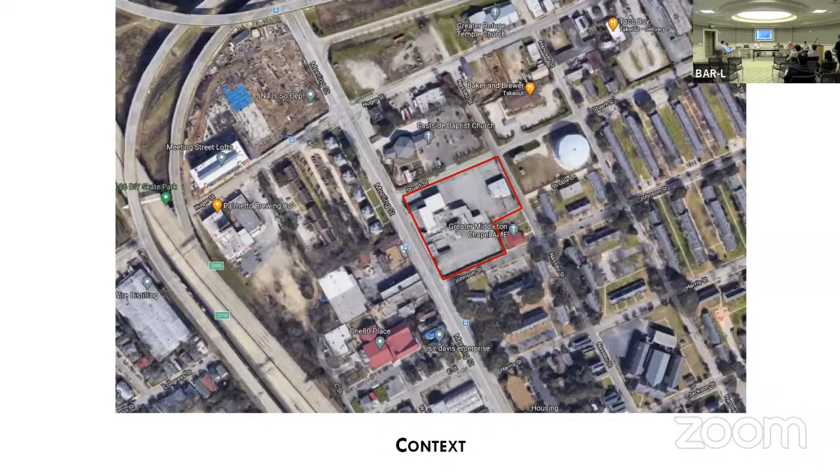And with that, we have some context slides. First one there, if you'll back up one please, Mr. Golly. That shows Meeting Street on the west, Johnson Street on the south, Stuart on the north, and Nassau on the east. That central section there is the portion of the building that will remain as what is being termed the remnant building. That is a portion that has been approved for demolition. This is looking from the rear; most of that, in fact all of that you can see, will be removed. Across the way there are these historic structures, and the first on the side is the Greater Middleton AME Church at the corner of Nassau and Stuart.

Okay, now a quick presentation, thank you very much.

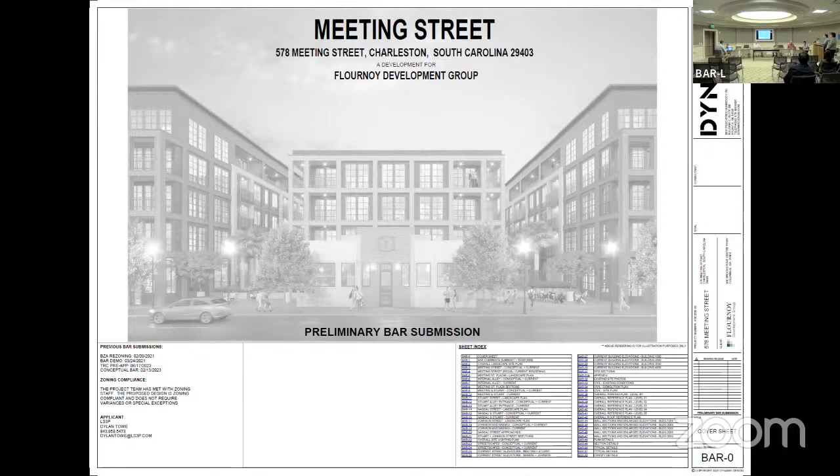What we're going to talk about first is the actual comments themselves. It's a little hard to read up here, but there's a handful of staff comments and a few board comments we want to go through. I'll read the comments and touch on our approach, and later in the presentation you'll see visual representation of how we addressed them.

We took the same thought and care with these comments that we did in the initial round during the previous reviews of the multiple design iterations for this project. I think it'll show that we've taken the success of the original conceptual design, built upon it with the feedback from conceptual review, and enhanced and furthered the detailing so the project remains as high quality as before, building on the success we had established.

The first comment was asking us to restudy the fifth floor, and you can see in some of the images on the bottom middle of the page. There were comments about the darkness of the fifth floor that fronts and wraps around the two corners. So we'll talk about how we addressed that from a detailing and color perspective.

The second comment was that at the fifth floor elevation, the brick wasn't wrapping around one of the elevations—it was just a flat facade, with fiber cement wrapping around the corner. So the request was that we continue the brick around that corner, which we've done.

The third comment was asking us for the fourth and fifth floors to be more consistent. That's in regard to some windows shown that are of a horizontal orientation. So we've removed those from the project so that the windows that remain are vertically oriented, to be consistent across the entire project.

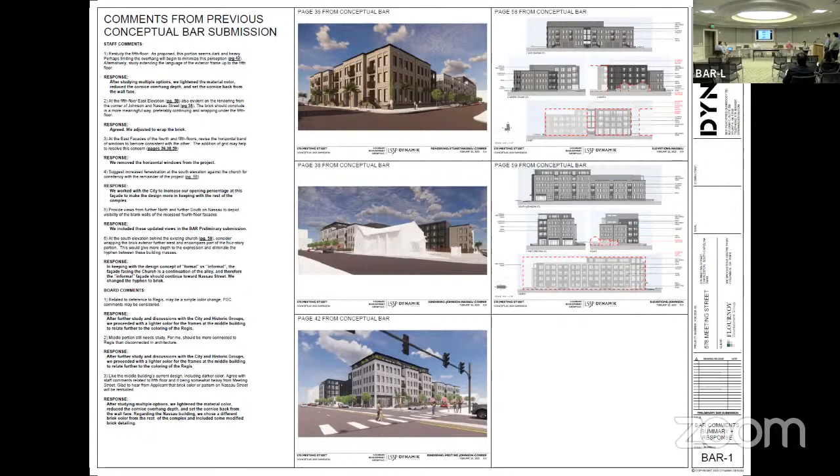This is Christoph Drumming from DesignWorks. In terms of site plan, it hasn't really changed. For those who were at the meeting before, the whole concept was to break the building into four buildings with alleyways throughout, pedestrian access on four sides, two plazas on Meeting Street to welcome the public into the site, with the historic building in the middle.

We kept pretty much the design from the conceptual level, just fleshed out further in terms of materials, detail of the planters, height of the planters, and other items.

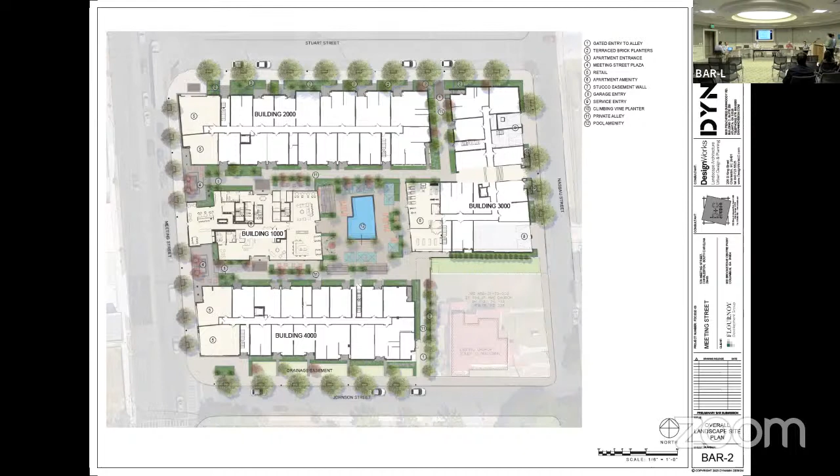We made some adjustments to the colors being painted onto the existing Regis building to give a little more character and delineation between the various facades to accentuate the design. Currently it's all painted white brick, so we have three separate colors for each tier of that facade. The request we thought was most appropriate was to lighten it up, so you can see the colors a little lighter in the new rendering on the bottom.

One thing that came out of that was some general concern about the amount of fiber cement being shown, which is what those outboard frames were originally proposed as. So we went back and thought through the detailing of that and what the best material was to create the look we were trying to achieve.

What we settled on, reflected in this model, is a prefabricated profiled FRP panel that creates the outboard element, reducing the fiber cement on the project by a little more than half. One of the main reasons we wanted to go with FRP is because it gives consistency in the detailing and in the look of the building, and it reduces the number of seams. In the previous detailing, built up with fiber cement profiles, maintaining the level of craftsmanship we want would be difficult.

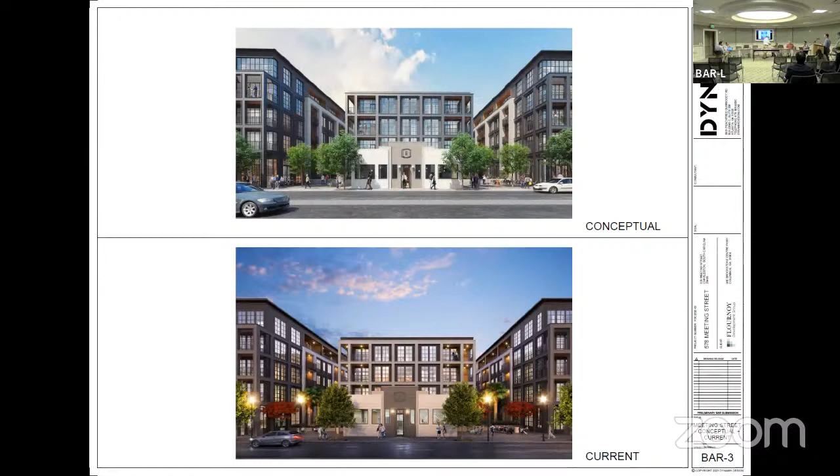In the enlargement you can see a little better how we incorporated that. Before the conceptual review we did try a more traditional design for this building to make it look more like the Regis, but all the iterations we did felt were not in keeping with the design of the Regis. It served to make the Regis feel like it disappeared into that building, whereas keeping the contemporary design lets the Regis have its own presence on the street.

Going down to the street level, the project has really not changed from where we left the scheme. What you're seeing is basically the use of pavers and bricks. You have a small sample on the top right and a physical sample here, but it's basically keeping the tone on light gray, darker grays, with mixed texture. It's not really brown brick, it's more of a lighter color.

That will also carry into the alleys in a much more simple color palette. We're using those three colors to create a kind of classic pattern on the ground, and then you have a few steps up to the alleyways.

The detail you see in the gates, which you don't see in the 3D color, uses the same dark, kind of brownish color. We're using that same color for the gates, the arches, and the lanterns. The ground is basically sealed block stucco with a cap of precast, using the same palette as the rest of the buildings.

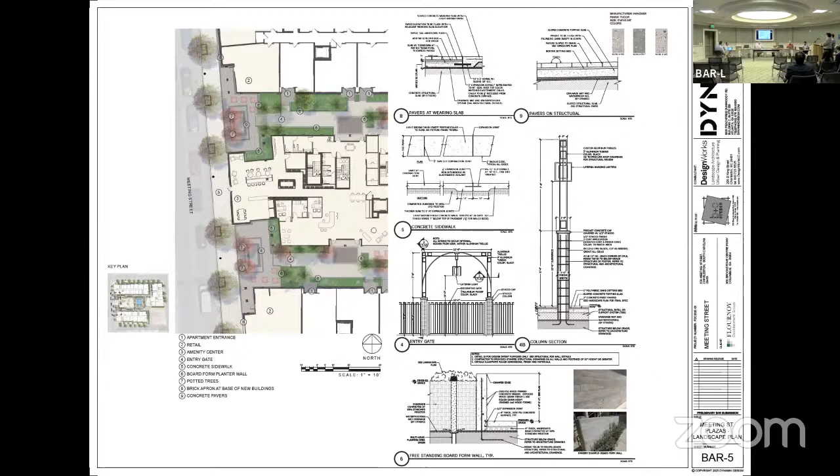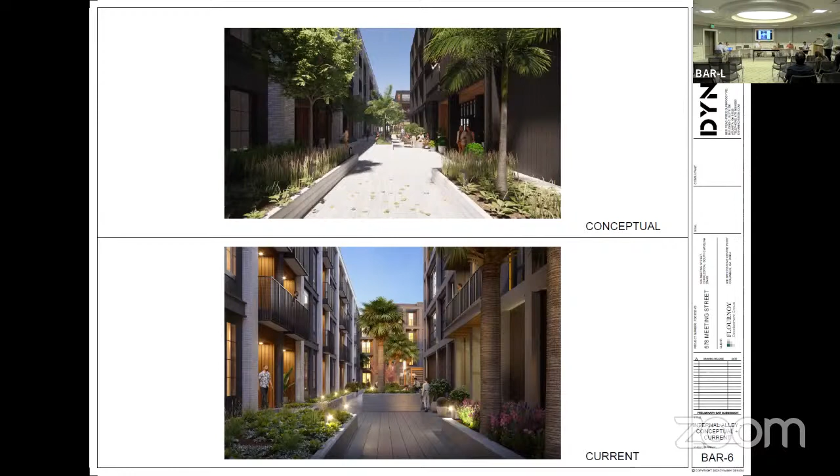The only thing we want to talk about here by including these sections is that part of the challenge with this project is that it's in the floodplain. We have to have the residential flooring at a certain level above that, and we've buried all our parking. So one thing we've done to make the project better as a result of working through those things is to let the difference in elevation help delineate public versus private, and the transition from the public street area—where there's a lot of planters and knee wall seating—to the more private alleys that are just for residents. This is still the case here from what we presented originally.

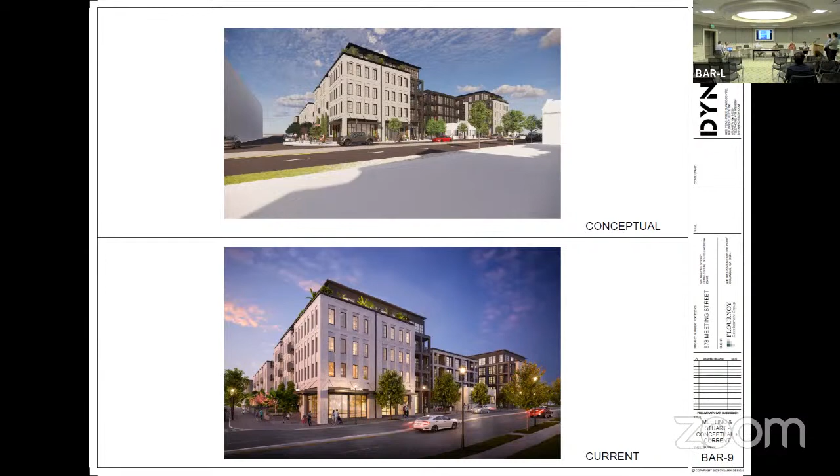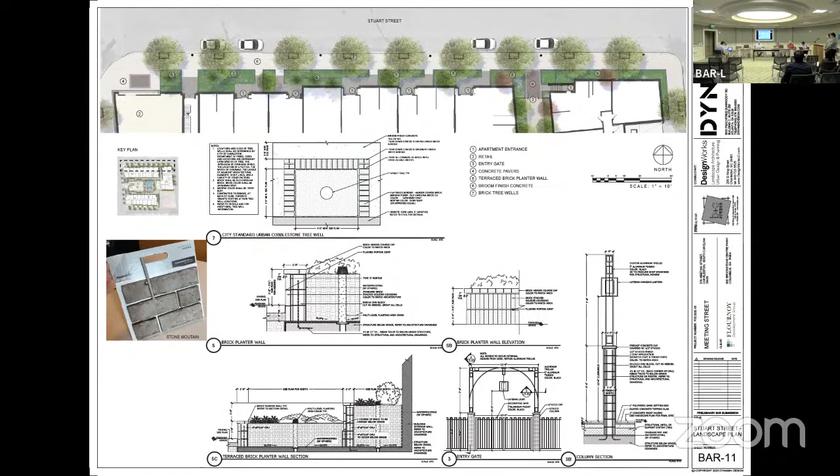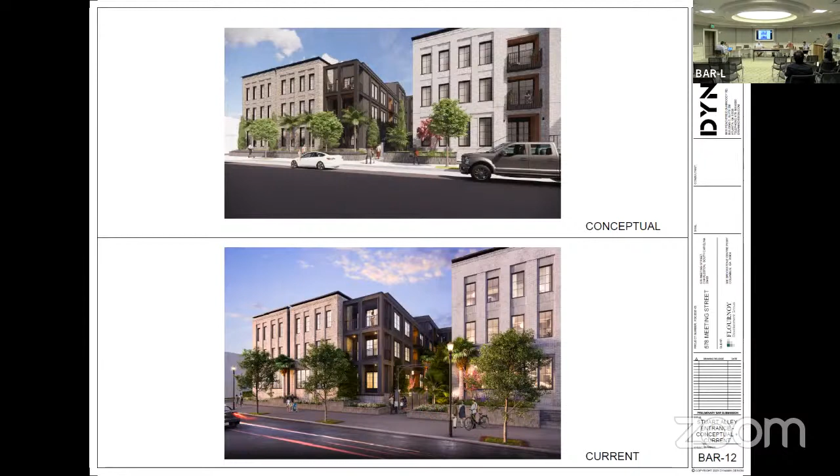Another thing you can see from the evolution from the conceptual design, as we worked in more detail about the trees with those palms and everything else, is that we tried to keep those planters as low as possible—like a big wall in front of the building. So when we don't need the trees, we keep them at 19 inches, 20 inches, then 25 inches, and go up to 26 inches when a tree is needed. This helps in this scenario to show the gate better—if you get it really high, you can see the iron gate in the middle, with the lantern.

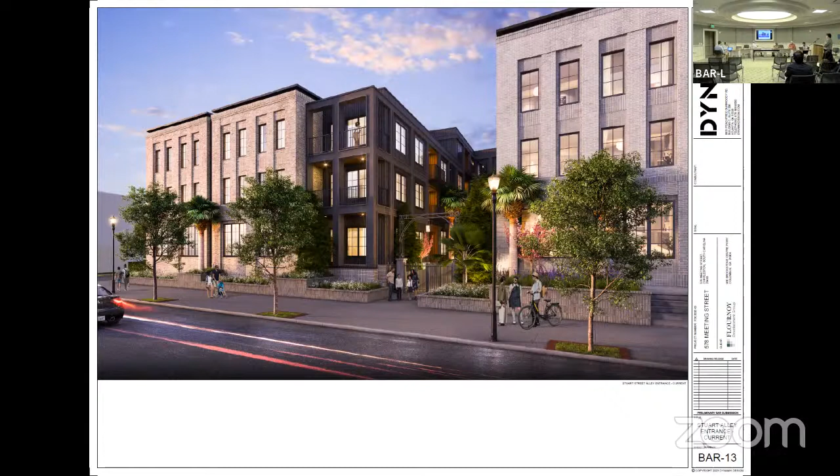That's the next street, which is more of a less-public street. There's still a corridor access for pedestrians in the middle, with a lantern hanging there. What we have here is the same simple idea for the materials of the planters, using the standard tree wells.

One thing you'll notice between the original conceptual rendering and the current one is that the planter transition around the corner was reworked, because one of the issues we ran into with that corner was it getting really busy with the stoop at the corner unit. So we eliminated that and have the planter wrap low around the corner, stepping up where the trees are, keeping it consistent with our design language around the streetscape.

You'll see also that the windows have changed a little bit, so the ground floor windows are larger and more open and visually inviting. And then we have the double windows up above that.

Is the base higher as under the standards? No, it's not higher. It's the same height it was before. It's just the rendering makes it look that way. The planter heights change also, that's why we've got it lower with no tree in the corner, so there's not as much impact in the corner from the planter seating.

This is about 6 feet or so from grade to that ground floor of the residential unit where the stoop was. It just felt like an unnecessarily tall stoop and didn't really present a nice facade to that street frontage.

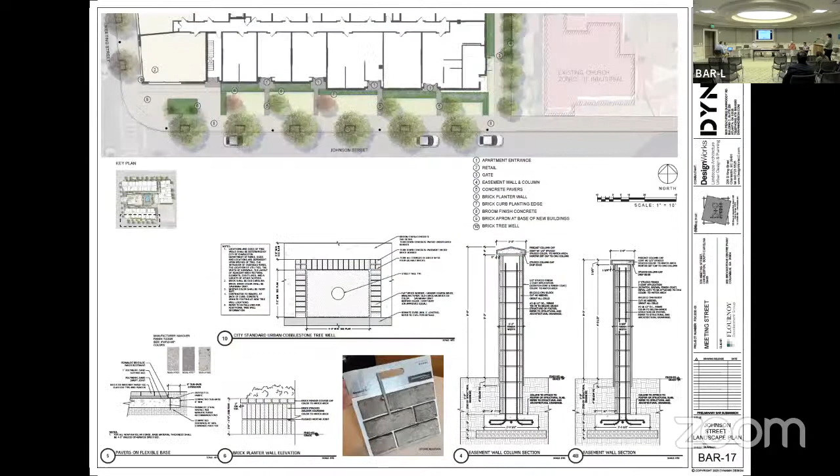You can see the detail on the right. Basically, the way we create privacy between the church and the building, on the left, is a lighter colored building, building a CMU block stuccoed with a precast cap with some columns on regular spacing, to basically give more privacy to the church from the walkway that leads into the complex.

And on the other side, what you're using is the green hedge. It's actually going to be a green wall along the facade as well to create privacy. The reason we did just that as a hedge is because we don't have much property, so we try to make it as efficient as possible and to screen the spaces, and it will be softer to use landscaping.

On the side, you can also see what's most likely the most significant architectural revisions, on top, where I was talking about the south elevation of the building that faces the church, needing to have more windows. Originally, and still, that building is very close to the property line.

Fortunately, there is an easement that runs right along that property line, and we worked with the building and fire departments to make sure that we were allowed to have more openings on that facade. So they confirmed that we would be able to have the amount of windows we have shown.

This is also where the request was made that we wrap the brick, return the brick more onto this facade, so we've got twice as much brick as we had before. We kept the taller 4-story portion as the fiber cement FRP that we have on the rest of the alleys, because we feel like this is still something that's more private.

It's not public street facing because the church is in the way, so it follows the same more informal design language that the other alleys do. And we did agree that because there's still so much exposure as you come around the east side of the church, returning the brick further into the project was the right move. So that's what we've done here.

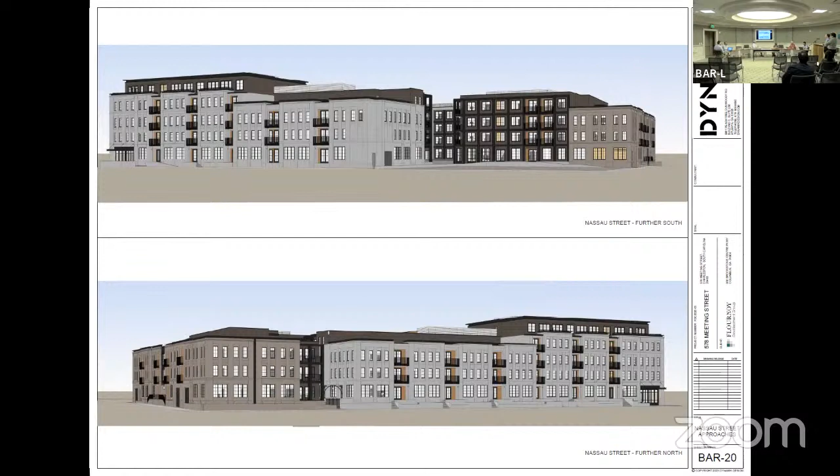Since those were the changes that were requested, we feel like we've taken the comments in, other than the one about where there were multiple comments about different directions on the center building and whether it's darker or lighter, more traditional or less traditional. We feel like the design we've come up with here is the one appropriate for giving the region its own sense of place, but also working with the design language around the rest of the alleys and the rest of the project.

So the rest of the documentation is the detailing requested, and we're happy to answer any other questions you have about the design progression, addressing the comments the board has previously raised, or anything else you have.

Okay, any questions from the board?

None. I don't believe we have anybody to speak on the application.

So we'll move on to city staff comments and recommendations. All right.

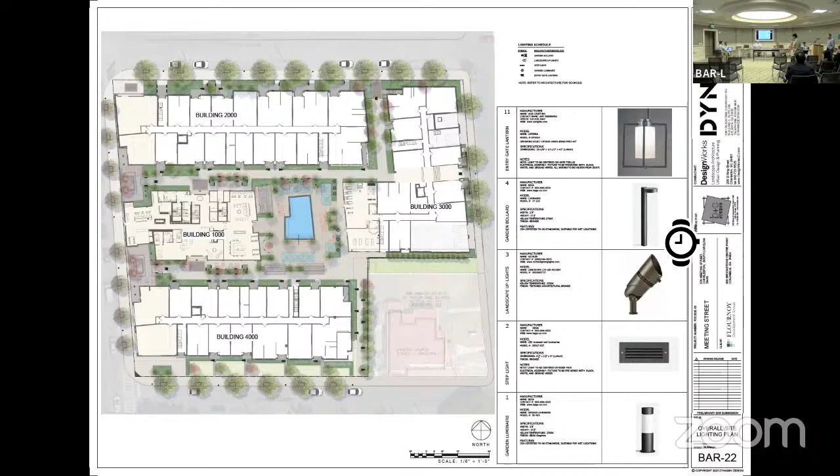Staff notes: this preliminary application follows closely the conceptual submittal, which, after 2 deferrals, is greatly appreciated and lauded by the board and staff, and most concerns have been addressed.

This material also appears to be used at balconies and at the entry door heads and surrounds, and occasionally at walls in other certain areas. While generally opposed to this on the grounds that it is not an authentic material, staff would like to see the material at presentation before weighing in on it. We have seen the material and think that it will likely be okay and is acceptable.

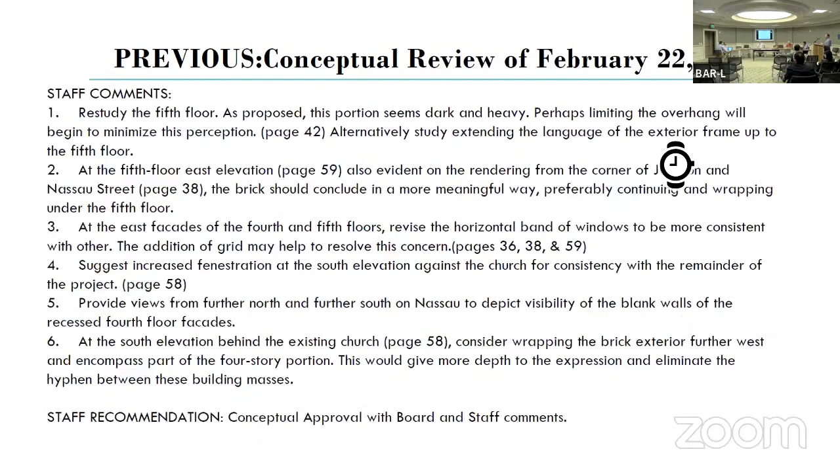Kind of going along with that a little bit - you've got a couple of facades composed predominantly of either the FRP or the fiber cement, which I think y'all are using interchangeably. Could you flip to an elevation view that shows us the greatest extent of either of these materials on a single facade? Yeah, if you can go to probably the first full rendering in front of the building.

So if you take the center building as the first example of the lighter gray material, this outboard, sort of cylindrical frame that's out there - that's the FRP. Everywhere we've got the fiber cement, it's in a recessed condition - it's at the balconies, behind the FRP, down the inside of the galleries, and on the backside of that building. So, just to make sure I'm not being obtuse, this is the darker material that surrounds the windows - so there's two colors.

There's the wood look, which is actually more on the inside portion, like at the balconies. And then at the inside, right around the windows around that middle building, it's the kind of charcoal gray color. Okay, and it's a smooth finish like that - that is the gray color.

Well, that's the FRP material - it's the same material as the wood look, but in a solid gray tone. And there's not a piece of that, is there? Not that color.

Are the corners fused, or - there's a prefab metal trim piece that goes at the corner, so there's not going to be a big bulky trim piece. It'll be a clean, not mitered corner, but a piece that it slots into for the shiplap.

Is that extra? So I believe what they do is it fits into the groove on one side and into the tongue on the other side. Part of what sandwiches into that tongue and groove is the mounting bracket. That's right, and so the vertical corner piece just somehow integrates into that also? Yes, it's almost like if you think of tile, like a Schluter strip, where two pieces of tile come together and you have the little thin metal corner - same kind of idea, like a puzzle.

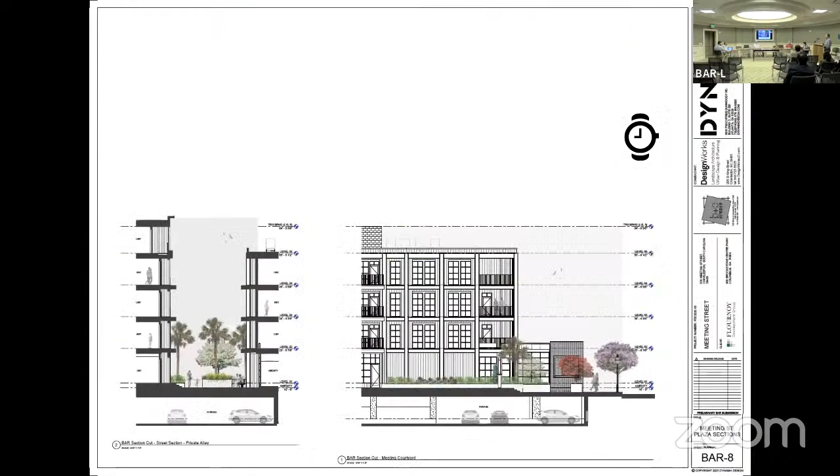Preliminary requires wall sections. It may be helpful for us if you could fast forward to a couple of details to give us a sense of the walls. I looked at it, I didn't know if that was truly representative of how it would be done. There are a lot of details towards the end. It might be helpful to lay out, over that one page, a plan view.

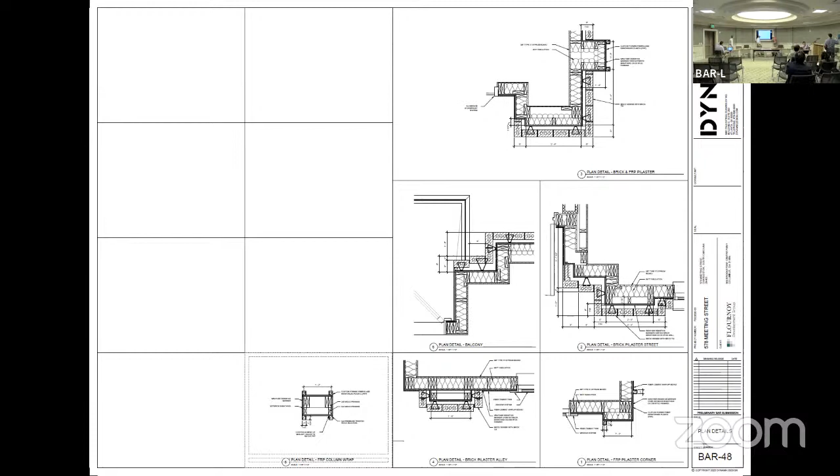You can see in the bottom right, the plan detail shows the FRP. The two little bump outs are where the FRP wraps all the way around that corner. We have the same thing in the detail on the bottom left of the page, where the full-size pilaster has the FRP on the front and back, so we have consistency there. Let's go to the next page, we have another plan detail later on.

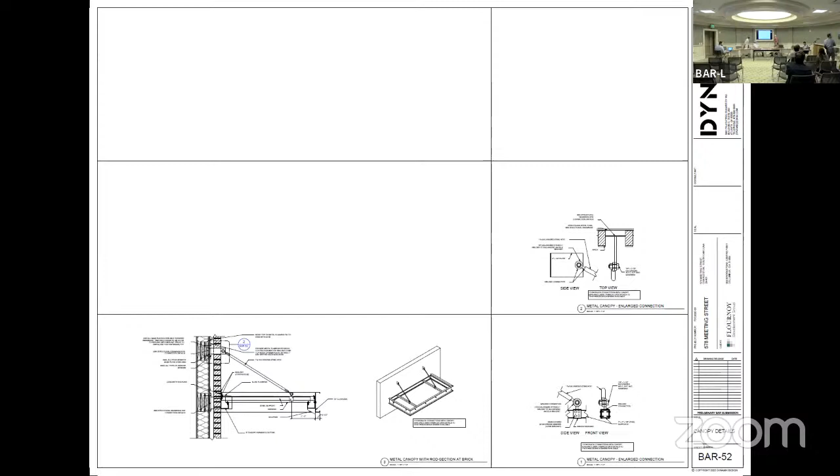That specific detail we can provide, and it will definitely be a part of the mock-up that shows how that outside corner works at the vertical shiplap siding.

Okay, all right, well, let's shift more fully into board discussion and possible motion here. What do my fellow board members think?

It seems like the project went really exceptional, and all the discussions about the colors and materials and intersection of the different materials. Yes, we will see more of that on the final, but also on the mock-up. But I agree with staff comments, and I would support the preliminary approval.

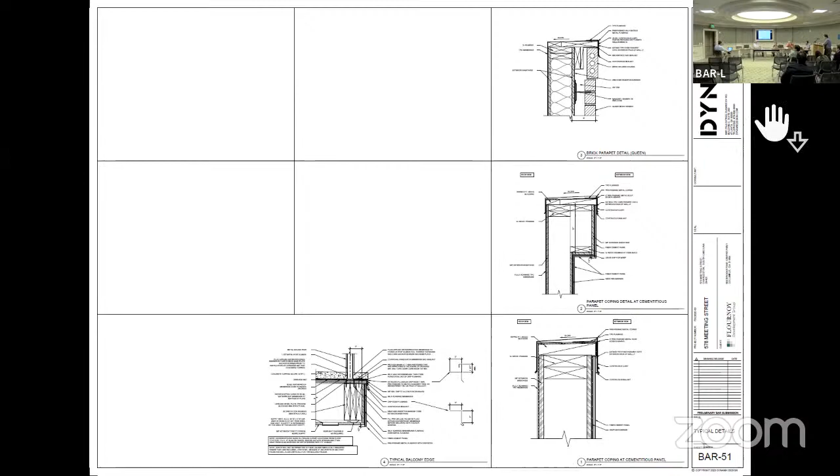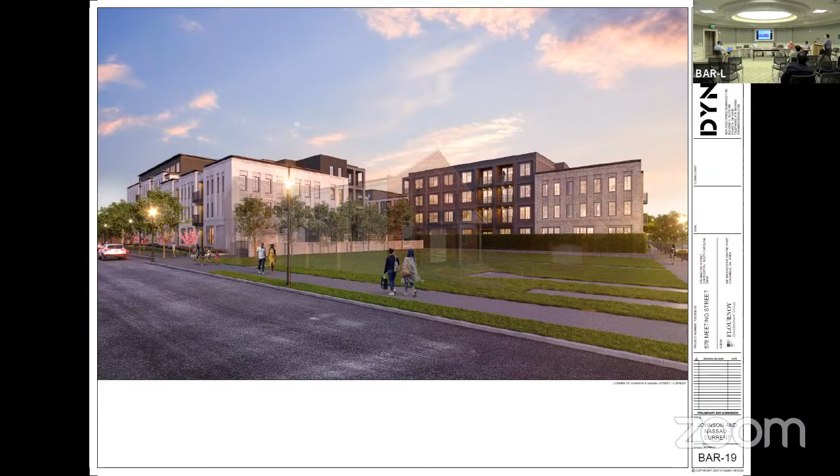Actually, you can see it better on page 19, I guess, top left. Two windows facing back, now just a blank wall. So that was where we had the horizontal windows because of the actual use inside there for the unit.

Richard, the chosen color for the top floor, the dark color — I mean, obviously it's on there, so that's what you think is the best color, the best tone, the darkness of it, for the fifth floor facing Meeting Street. Well, it's all the way around.

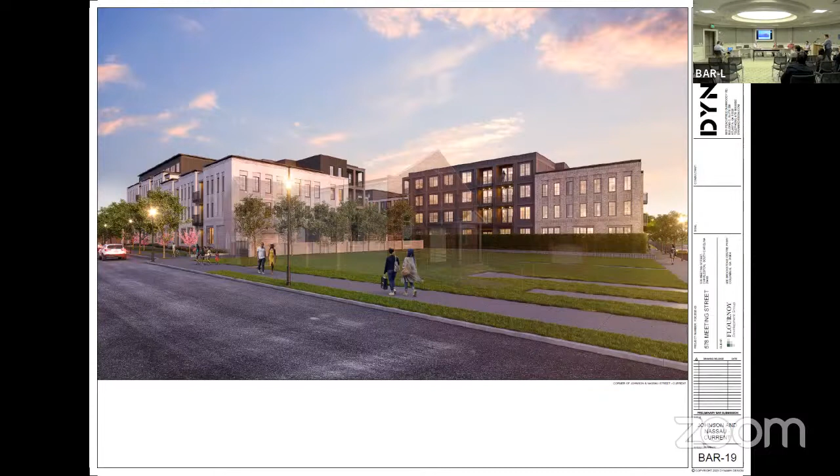I think differentiating it from the floor below allows the building to feel a little shorter. Over the years, people say that makes it look top heavy. I personally don't think that's the effect; I think the setback shading will allow the overall mass to work.

I'm not really concerned about the color palette, although I think it would be good to include some sort of pop of something a little more vibrant, because it's very muted.

I guess the further details of the sample panel will bear out the success of these composite materials. But I think...

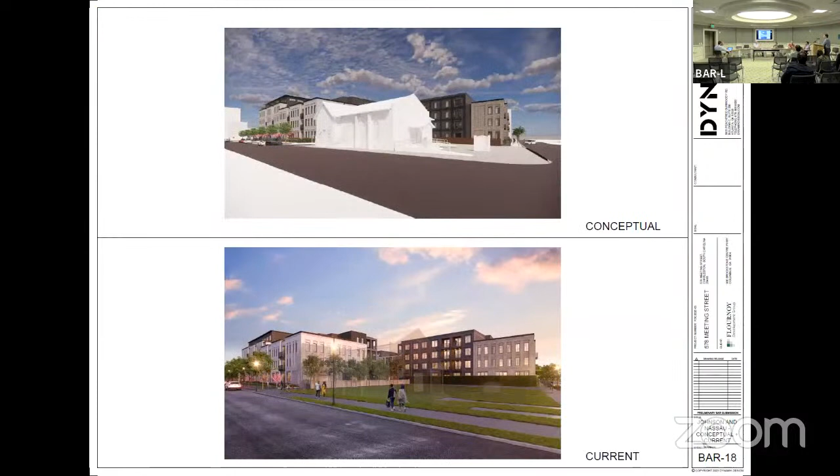One thing that did change at the corner of Stuart and Nassau, when you removed that last stoop to clean up the composition, it created a circumstance where you have a nearly 6 foot tall brick wall, mitigated a little by the planter, but still an unbroken 6 foot tall brick wall. I know I never really realized how much fall there is across the site in that direction, but I think that should be examined, not to falsely lower the windowsill, but rather maybe put some sort of detail as a transom above it or a bulkhead below it, in these areas here.

16 is larger. There's one thing about the rendering, the people are shown too small. For some reason the rendering doesn't show it like it's supposed to be.

Well, that's kind of what I was looking at. In general, the first floor needs to interact with the pedestrian, and right now it's a solid wall there. So I'd say study a little bit more how you can engage the base.

There's been a few comments about tone, color, and palette. It's really hard for someone like me to review something like this where the outside lighting changes from one proposal to the next. When you look at the wood paneling, it's lit up in these pictures, but not lit up in the other ones. So it's a false coloration of what you're actually going to see during the day.

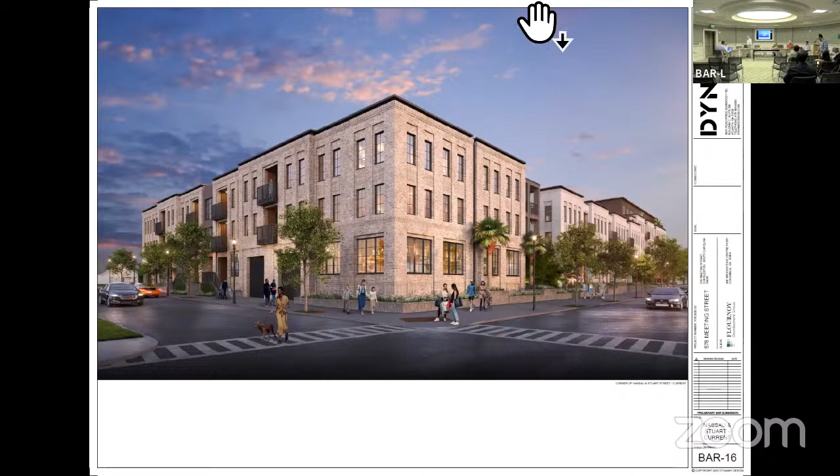Did you put those guys in there for you? That was our guys. How do you like it? Yeah.